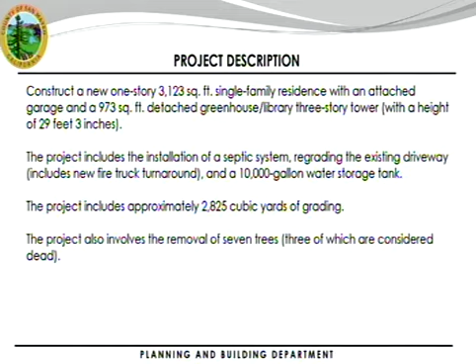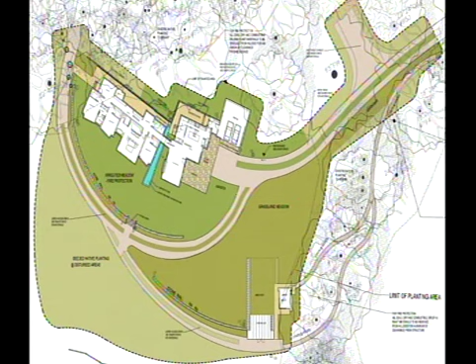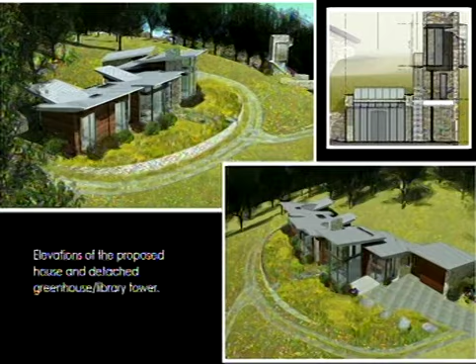These are some renderings provided by the architect. You could see the house towards the front of these pictures, and then the library tower towards the upper right-hand corner.

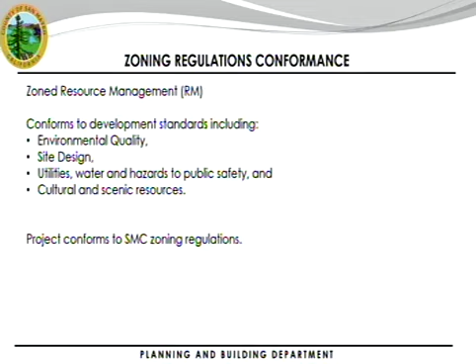In the zoning, this property is zoned resource management. It conforms to all the development standards of the resource management zone and the zoning regulations in general. I've highlighted some of the development standards here, and as you can see, the proposal exceeds them by quite a bit on all fronts.

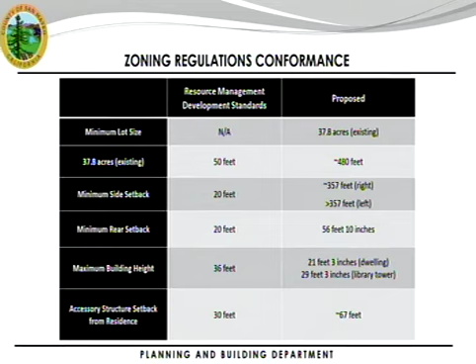The grading required for this is 2,825 cubic yards. Most of it is cut with a little bit of fill, to regrade the driveway, create a fire truck turnaround for the structures, and use some of that fill to flatten out the meadow area.

7 trees are proposed to be removed. 3 of those trees are already dead. The 4 living trees are being removed because they interfere with where the structures are to be placed, or the utility lines.

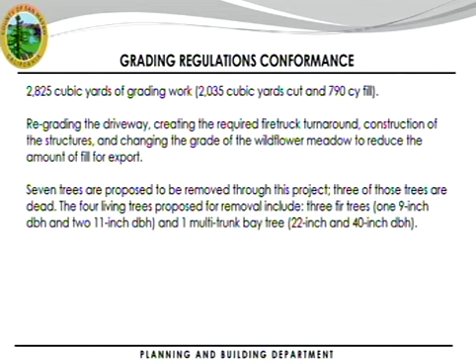With those findings, staff is recommending approving the project as per the conditions in attachment A. Thank you. Does the commission have any questions for staff?

In the high fire hazard severity zone, does the county still allow wood siding in this area? I don't know the answer to that off the top of my head. I know all siding needs to meet certain fire resistant requirements, but whether there's wood siding that meets that requirement, I don't know off the top of my head.

This appears to have wood siding. The project has been reviewed by CAL FIRE, and they included conditions of approval which include different fire ratings for the materials. The building department has also stated that as well. Thank you. Any other questions?

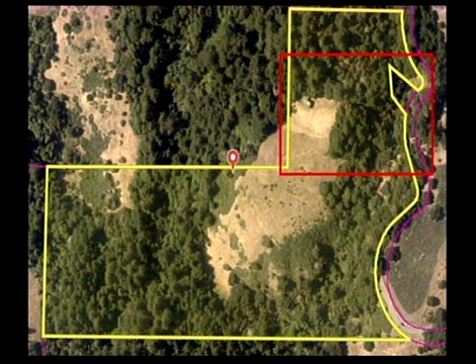So neighbors are not concerned in any way? I have not heard anything from neighbors. Okay, thank you.

Regarding the condition of approval of a drainage section, is there any system set up for follow-up and compliance? So the applicants have submitted a building permit, which will be also reviewed by the drainage section, and they'll set up their conditions to make sure they're complied with.

Because I see in the report that it says it's being pre-approved, but with a conditional approval for follow-up, and I want to make sure there is a way, when they discuss this, because we need to approve this first, that there is a way of follow-up and compliance when this is pre-approved.

It's not totally approved. Yes, so when the building permit comes in, which it has, it will be reviewed by drainage as well to make sure that all the pre-approvals were complied with in the building permit. Okay, thank you. Does the applicant wish to make a presentation at this time?

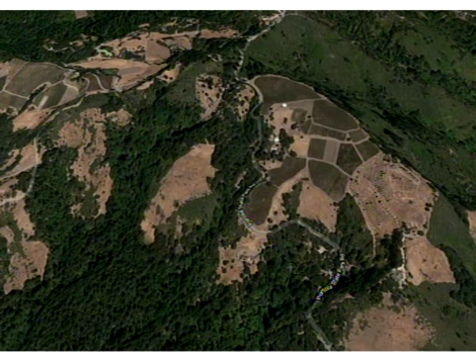We've been working closely with all the fire protection agencies and the various county departments. There are several arborists involved, and lots of duplication in review, so there's a lot of follow-up to make sure things are in compliance as the project goes forward. There are geotechnical engineers, geologists, water use folks, lots of people involved in the project.

So that's it, really. If you have any further questions, we're happy to spend more of your time, but we'd rather just create the home and show how a home can actually be net zero.

Lisa: I just wanted to ask about the metal standing seam roof. It has a pitch of 1.5 inch in 12 inches. I'm interested because we'd heard on another project that it's important to have a lot of pitch for that type of roof, so apparently this can be used on a more flat roof.

Yeah, so what manufacturers do - we work closely with manufacturers. Because we're really into what we do and sincere about it, we research a lot as well. We work with a lot of the tech departments, so we don't just specify materials - we know a lot of the folks at the technical departments of many manufacturers. A manufacturer will give a blanket warranty and criteria for use of their product because they want to be very safe, with a lot of factors involved in their criteria to give a safety factor.

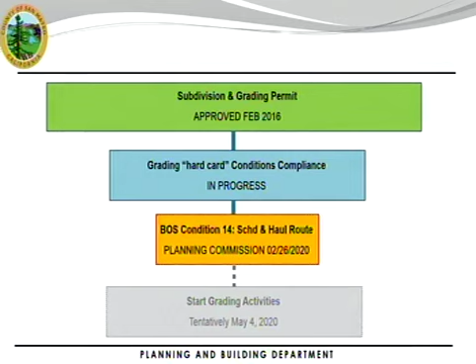As I said, condition 14 asks the Planning Commission to take a look at the schedule of grading events, hauling equipment, haul routes, and dust, debris, and traffic control measures.

So just one detailed slide on dust, debris, and traffic control measures. They'll have a stabilized entrance to comply with stormwater measures. All loads will be leaving the site tarped, and dust control will be conducted on a daily basis, on an ongoing basis throughout the day. Street sweeping will be as needed on a daily basis, and flagmen will manage the site entrance.

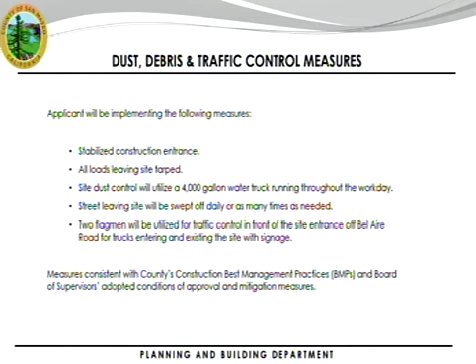The applicant will spend a good deal more time going over the actual grading operations as they're planned out, in part to respond to the comments from Planning Commission and public last time. I'm going to hit some of the highlights and then turn it over to the applicant so they can present and answer some of your questions from a technical perspective that I may not be able to. First of all, one of the big issues from last time was wet weather grading.

The schedule does not include wet weather grading at this point. They're going to start the actual moving of dirt on May 4th, pursuant to this schedule.

There was concerns expressed about Rainbow Drive, its landslide stability, and narrowness. We consulted with Department of Public Works again yesterday. They, of course, attended last meeting and assured us that...

Although the phase one haul routes do entail use of Rainbow and Lakeshore, that's for two months and a little bit, for May, June, and a little bit of July. Those trucks will be empty, so there's not a load issue from the standpoint of running heavy loads over that. But also, Department of Public Works assured us that their monitoring has shown no movement in that landslide over the many years they've been monitoring it, and that the streets are wide enough to accommodate this traffic.

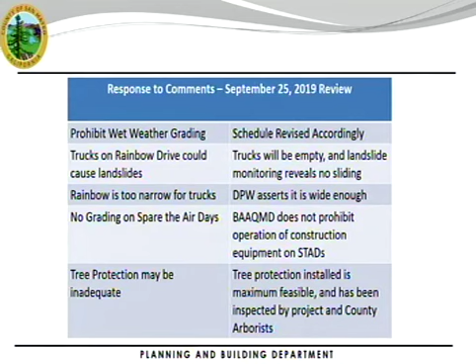There was some concern expressed about tree protection being inadequate. We've consulted with the county arborist as well as the project arborist, and although in some instances trees are planted very close to the property line, meeting ideal tree protection standards is not feasible. The protection that is installed is the maximum feasible, and arborists assure us it will protect those trees.

One thing that came up at our last meeting was that there were dusky-footed wood rats present on the site. We took that seriously and had the developer hire a biologist to assess the on-site conditions. They found several nests on the site, something in the vicinity of 30 or 40 nests, maybe more.

Not all of them were active, but they found all this nest material. So they consulted with California Department of Fish and Wildlife standards and developed a plan for wood rat relocation to another part of the site that's not subject to this development.

One concern was there were no specific dates in the grading plan, and now those have been included. Also, there was concern about the Cal Water project on Parrot Drive conflicting with the grading operation, but those two projects will be coordinated and won't cause a problem. Finally, there was some question about whether the project could grade the new driveway first. We believe that cannot be done first because of the agreements in place and the need to relocate Cal Water infrastructure.

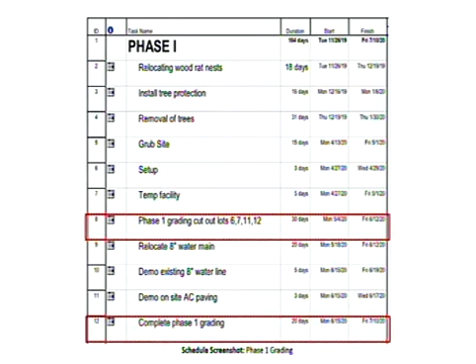Phase 1 grading, inclusive of the temporary Cal Water access road and Cal Water infrastructure relocation, will hopefully begin, assuming approval, on May 4th and end July 10th. In front of you is the revised schedule for the Phase 1 grading operations.

Phase 2 grading includes the remainder of the mass grading, some utility work, and paving. This will begin June 22nd under the current schedule and end September 30th. In front of you is the revised schedule for the Phase 2 grading operations.

What we want to express at this hearing is that the phasing of the grading and utility routing will occur not only outside of the wet weather season, but is also required by Cal Water in order for us to cut in the new driveway at the beginning. We had to make these schedule adjustments per everybody's concerns from last time.

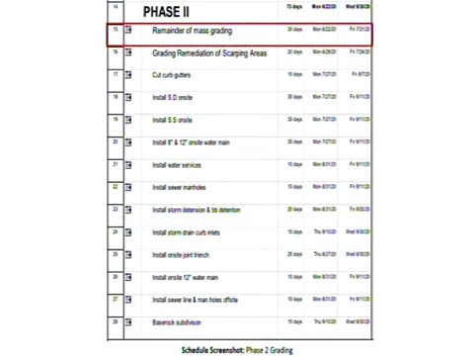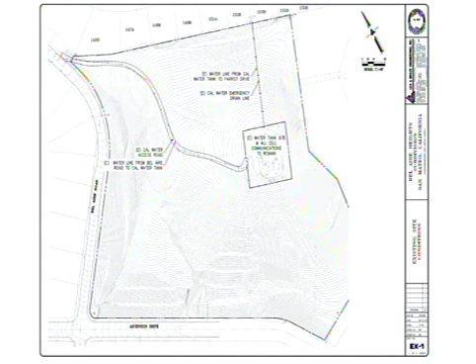First, a secondary temporary Cal Water access road will be reconstructed. Then a portion of the existing 8-inch water line running from Bel Air Road to Cal Water's property will be relocated. This work is required before the temporary roadway, shown in later exhibits, can be installed, allowing haul trucks to access the site by taking a right-hand turn from Bel Air Road to ensure access is always maintained. Second, grading in the northeast corner of the lot is required to relocate the existing Cal Water line and emergency drain line running from the Cal Water property to Parrot Drive. This work is planned to start May 4th and end June 12th.

For the grading needed for the emergency drain line, in the top right-hand corner, this is when the water line relocation will happen, all within the stated dates. The temporary road will be graded and installed from Bel Air Road to the Cal Water property. With the first portion relocated, new entrance construction can occur, and access to the water tank will be maintained. New water lines will be installed from Bel Air Road to the Cal Water property, following the temporary roadway.

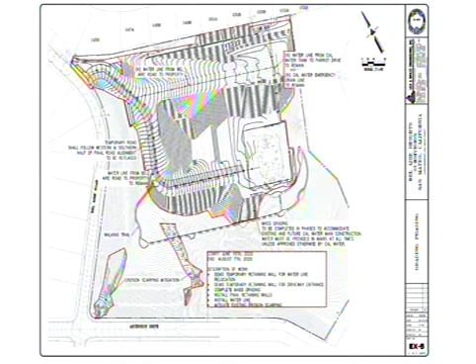As mentioned by Joe earlier, regarding the July 27th through September 30th work, one concern was that we were getting close to the grading moratorium in the wet weather season. The work done in that window is new concrete driveways, new sidewalks, and new curbs, so we're not doing any major grading. The grading's already been done. It's just paving work, and the utilities for water have already been installed.

There might be some utility work, but we're not talking about massive mountains moving or any grading that would create a huge truck haul issue.

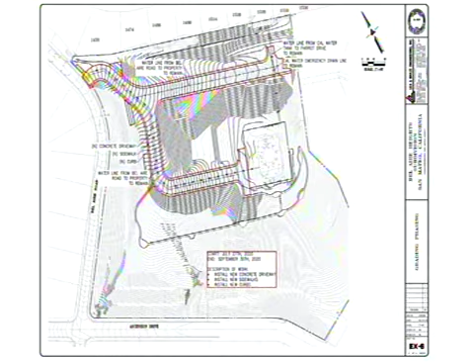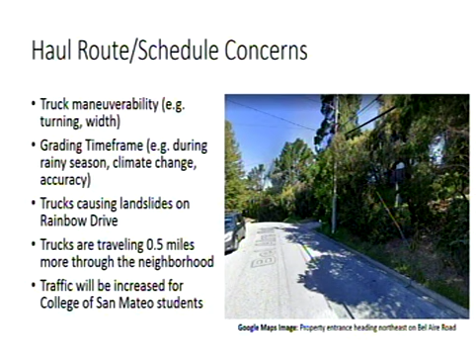Some of the concerns, and one of the main reasons for the proposed truck haul route, is first of all maneuverability of the trucks. Before you is the existing roadway that connects Bel Air Road and the Cal Water property, and here's a picture of the driveway as you're heading up Bel Air Road.

We simulated, using software in our office, the right-hand turn from Bel Air Road with the specified vehicle specifications. As you can see, in order for the truck to make the right-hand turn with existing conditions, we'd have to grade the driveway and remove existing trees and a portion of the neighbor's fence, shown in green. It's kind of hard to see because it's a lime green.

In order to make that right-hand turn, as requested at the previous Planning Commission hearing, the truck would have to drive through what is currently a fence and remove some pine trees that we've worked diligently to protect per the neighbor's request, per our grading plan. We'd also have to remove and do some additional paving there, which seems excessive when we can use a roadway coming down from the other side.

We also tried simulating a 3-point turn, or multi-point turn, for those trucks. Even after a 3-point turn, the trucks basically get stuck in the middle of Bel Air Road. We wanted to explore that as a feasible option to reduce trucks going through the neighborhood, but unfortunately they can't make that turn—there's a header there going the opposite direction of the way the road currently travels.

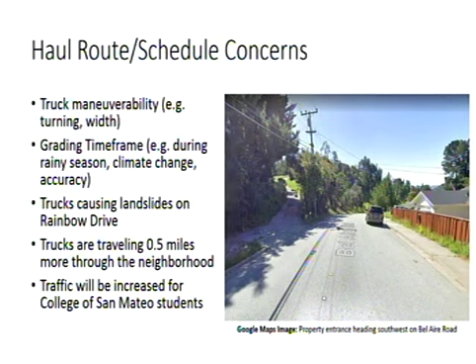So from there, during our initial studies, we decided the best accessibility for the project is coming down Bel Air Road, shown with this Google image. After simulating that with the same software, the trucks have no issues entering or exiting using the existing conditions, and they require no disturbance to the existing access, trees, or the neighboring property.

One of the main concerns from the last Planning Commission hearing was why the driveway entrance isn't cut in first so all trucks can access the site turning right from Bel Air—a fair question. As mentioned, one reason is to maintain Cal Water's access and ensure all their water lines between Parrot and Bel Air remain operational during construction. We have to do that work first before cutting in the driveway, or we'd be undermining the access road and the pipe would be sticking out of the ground, which is not good construction practice.

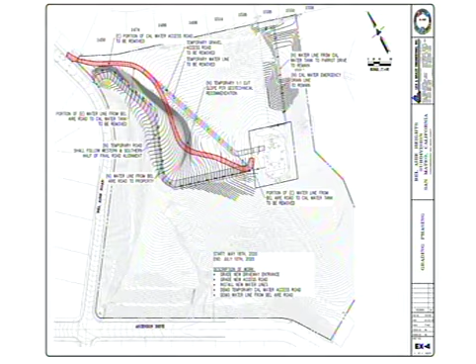The new access road and entry will be completed on July 10th. This means trucks can access the site via Bel Air Road two months into construction after starting May 4th. Before and after, using the simulation of the truck completing the right-hand turn from Bel Air: once everything's been relocated and temporary roadways installed, we can start cutting out this roadway for Bel Air, so we're not using the entire construction schedule for driving through the entire neighborhood. That's just what's required for those two months before we can get this roadway cut in, and then the truck haul route will be reduced significantly.

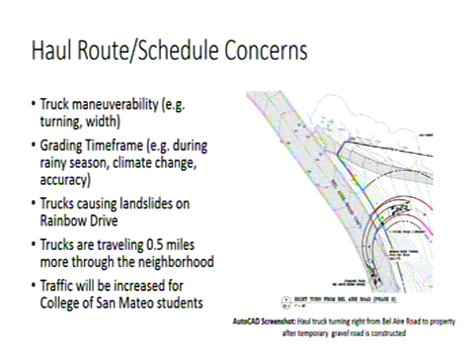Some other concerns brought forth during the Planning Commission hearing in September were about the grading time frame. Grading will start May 4th, which is after the 15th required per the grading moratorium. It was also brought up that the conditions of approval actually say April 30th. Taking that into consideration, we moved it to May 4th so that we're meeting the conditions and the grading criteria set forth by the county.

We understand that climate change also affects when it rains, so moving it to May instead of mid-April helps reduce the likelihood of rain during grading construction. Although it may rain into or beyond May, we've prepared an erosion contingency plan, provided later in this presentation and in the follow-up. It's also required by the state to conduct weekly meetings or inspections based on the stormwater pollution prevention plan, also known as SWPPP. Another concern was the Rainbow Drive landslides.

Joe already hit on that earlier, so I'm not going to go into further detail. The truck haul route length was a concern, as it's a long travel to get to the project. But as previously shown, unfortunately, per what we're given and what's required by Cal Water's accessibility and operations, there's not really another feasible alternative without doing additional work like removing trees, fencing, and encroaching onto someone else's property.

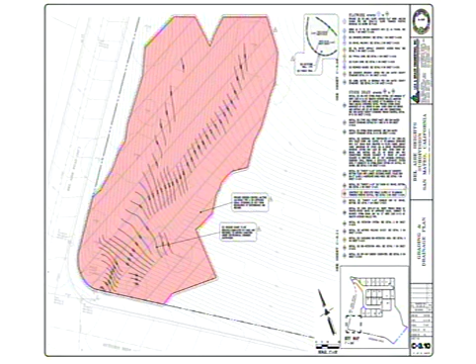My next questions are quality of life issues, because those are the ones I get a lot of phone calls on. Where's everybody parking? All the parking for construction will be on site, since it's a relatively large site, and because we are phasing the grading, we feel it is adequate that construction workers will have available parking on site and won't be taking up Ascension or Bel Air or people's personal driveways.

Hopefully not. So I'm just trying to imagine this in my head, so help me. When you're putting in that temporary road, your access into the site is gone, so they can't park on site, right? Technically, here, I'll go to the exhibit to show you. The entryway for the relocation of the road is not altered because we need it to be consistently connected for Cal Water to access.

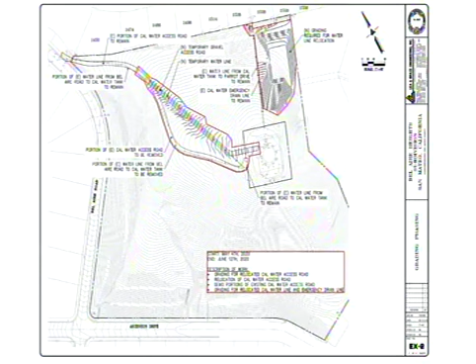So you've got existing, you've got the proposed road with existing, and then you've got removal of the existing. So people will be parking kind of in the northern part of the road. And you'll have enough space for everybody? Yeah, we feel there will be adequate space for parking for construction, yes.

Are flag men going to be used for traffic control, to let people know how they can get through, other than a lot of times barriers just go up and you got to go find your way through? I mean, what type of thing makes my life easier trying to access the top of the hill to the bottom of the hill? There will be flagmen present for that specific reason, because it's required for traffic control purposes.

I'm also under the impression that there will be signage for detours and for truck haul routes, some form of signage that shows them the route they need to be going. And if a homeowner is going to be turning up a road that is closed off, like the one you mentioned earlier, Crystal Springs or wherever it may be, proper signage is required so they don't hit that dead end and have to turn all the way around and go back through.

Will there be future notification, like in 10 days there'll be construction on this, for students who cut through to go to CSM? No, so they don't panic when day one comes and have to look for a new route out or in.

Currently for this proposal, no streets are being closed for this work. There's access, no closure. The only closure, on the other side, is for the water line installation through Cal Water. This proposal has no closures of roads, so the truck haul route is not interrupting or closing streets. The flagmen are for access in and out, to make sure the trucks coming in and out aren't cutting off traffic, and that they're controlling the flow in and out of the property.

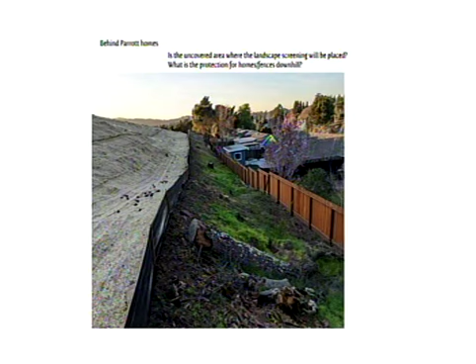I know that sounds silly, but my husband and I were home last week and a tree stump rolled down the hill, hit our neighbor's fence, and actually knocked a couple planks loose. The guy on the hill jumped over the fence and banged it back in, and it seemed fine, but that made us realize maybe there should be a little extra protection or procedure—especially because in looking at all the grading plans, that area gets steeper, not lower, especially for those first couple of homes. They're bringing in soil. So that's just a concern there.

Okay, well, you knew I was gonna talk about the trees. So there is a little confusion—there is a chain link fence around the trees right now, the top one, which is awesome, we're really happy with that. But we don't know, is that what you engineers are suggesting? There's no signage on it. We still see civil engineering plans showing that the tree protection zone, as written on those plans, stops—it only goes up to where that red dot is. And you have the rerouted Cal Water line going in where the blue dot is, which is 15 feet away.

And just looking again at all these new grading plans, somewhere around that red dot, again, the land gets steeper because they're trying to make that property get high enough to reach the road that they're making.

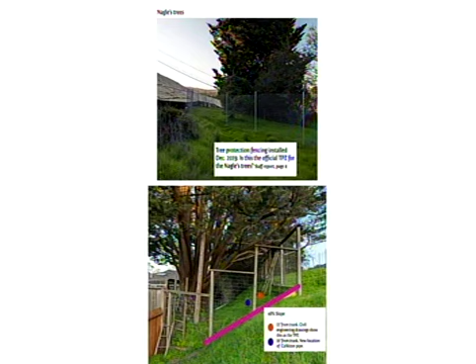So I appreciate there's a lot of talk, but right now where that chain link fence is, the grading plans show a lot of grading going on. So we're still nervous. We also would like—at some point there was a mention of a bond, some value put on those trees. We haven't heard any more, but they aren't $5,000 trees. They're 75 years old. They add value to our home, not only for the aesthetic, but because they also will block out the hill. So we're concerned about all of those issues.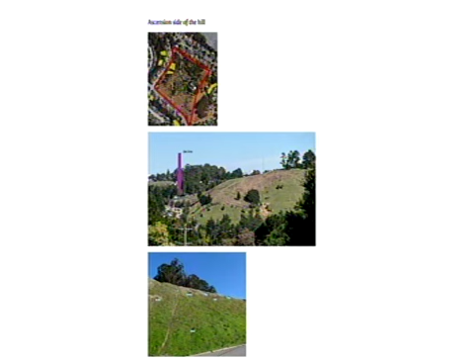My final comment is about the oversight. This project has been a little bit, let's ask for forgiveness, not ask for permission. And that does not instill confidence. We have an oversight person, but he's in Sacramento. So for example, Sunday when they were working and we called, he couldn't reach anybody. It's not that the person we have a contract with is a problem—he's responsive, he just can't reach people. The Oak neighbor complained to us about it before it was cut, but we couldn't reach anybody to stop it. Trent's in Sacramento, so he can't come and stop it. So we need a tightening up of that operation. And on the tree stuff, if somebody could put in writing what's actually what, that would be great. Thank you.